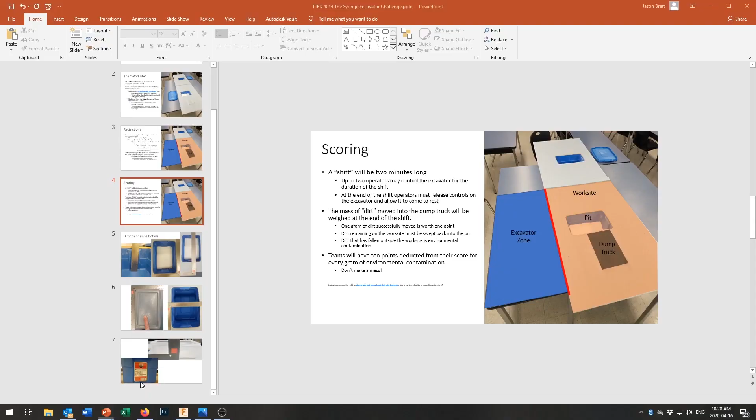To do that, we're going to have to add in some dimensions for the pit. Now, like everything else, I like to start off any of my new drawings or designs with a little bit of a sketch. So in order to get this sketch, I went back to a PowerPoint presentation a little bit earlier in this channel, where we went through what the challenge is actually going to be about and how it's all going to come together. Your excavator is going to be here in the excavator zone reaching into the pit.

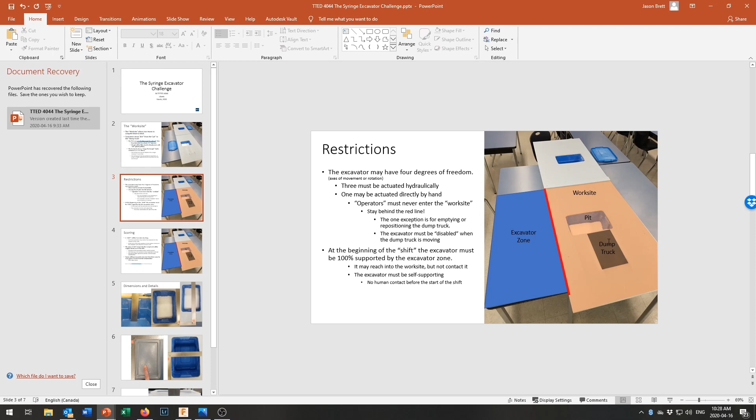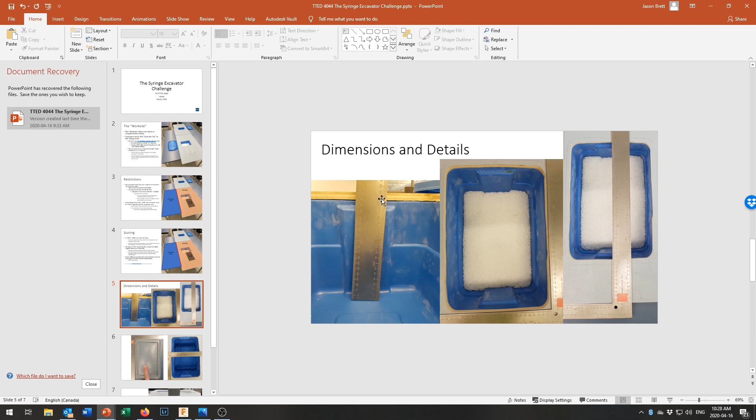The pit's going to be filled up a little bit higher, and you're going to be depositing the dirt, those plastic pellets, into the dump truck. And you're going to try to move as much as possible. Towards the end of that presentation, you've got some photographs with the measurements of the pit and some basically sizes and scales so that you know how big to make things.

So I was able to take some of that information right here, and I printed out a quarter scale drawing of the arm that I've got together right now. And then I was able to take the dimensions from the drawing and come in here and sketch in how this is going to go. And right now, this is actually looking kind of okay to me.

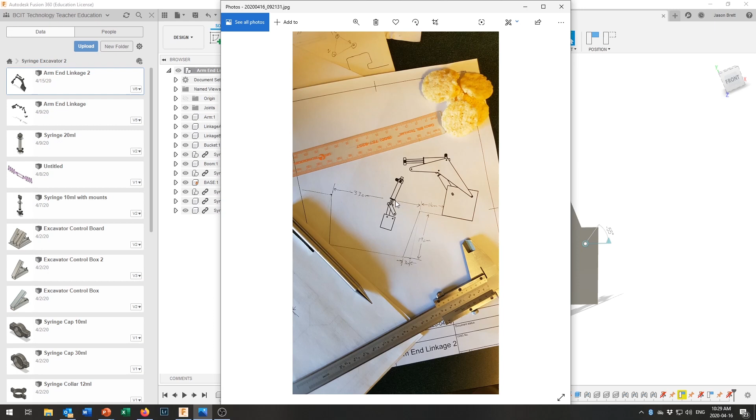Looks like we might want to get this down a bit deeper, so we might have to play around with some of those parameters in there. And we also need to be able to get it up 9 centimeters. Again, this is at a scale of 4:1, or 1:4, I should say. We need to get it up 9 centimeters on this side, or over on this side it doesn't matter because you can put the dump truck on the sides of the pit. We just want to make sure that when we do a scoop that we can lift things up and out of the way. And so, like I say, always start off with a drawing of what you're going to create.

So that you have an idea of what it's going to be when it comes time to go ahead and make that part. And then we're also going to take a look at ways where you can actuate some of these syringes individually rather than doing this whole inverse kinematics thing where I have to just keep pulling on it and hoping that it bends the way I want it to go. So hopefully you've got this kind of movement right now and things are limiting themselves and staying within their range.

And now we'll take a look at saying, do we have enough range? Now, keep in mind, our analysis is also going to be subject to our last discussion on the impacts of what happens when you lower that boom. And you can see right out here that we've got a nice big lever arm right up here. So we should be able to get lots of torque to twist that up and down.

But you have to watch out as that boom comes down lower and lower in here. Sometimes your lever arm gets shorter. And if you come too far and your boom's down on this side, then you've gone over center and locked it in place. So we are going to have to play around with some of our parameters to make sure that we don't end up locking our boom in the down position, because yes, we could drag it back up in Fusion 360, but that's not going to happen in the real world.

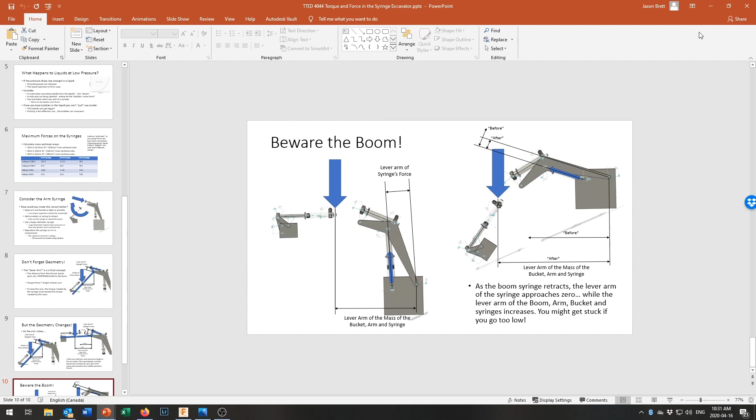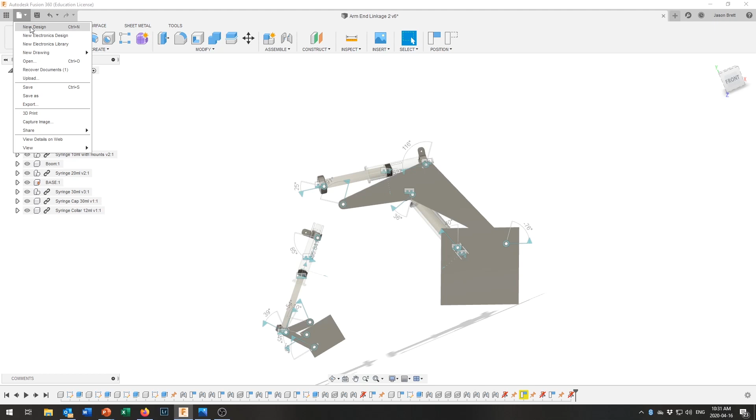Okay, so I think the simplest way for us to go about doing this is going to be to create a new design. So just come up here to new design, make sure that you've got your syringe excavator folder opened up right here. If that's taking up too much space on your screen, you can click on the little data panel right there and poof, you've got the whole thing. If you need that back again to see that, just click on show data panel, and we're just going to come in here and tell it we want a new design. There we go.

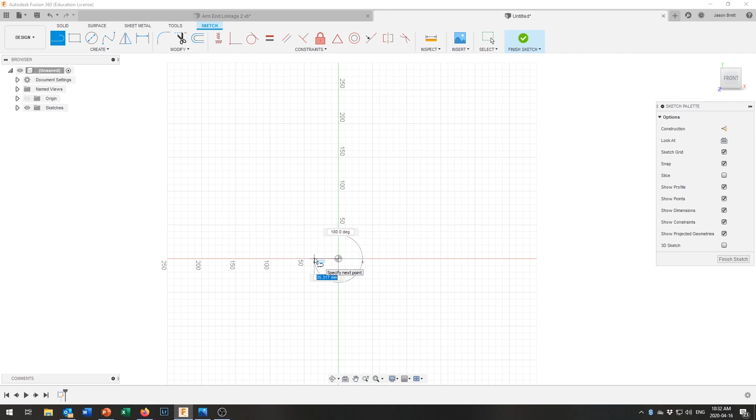And on our new design, we're just going to create a sketch right here, and we're going to pick any old plane. That one should do. And now we're just going to sketch the profile of the pit that we're coming into. Okay, and so let's come along right here, and we may as well just start at the origin right here. And according to my measurements, we'll be 11 centimeters along here, so that'll be 110 millimeters.

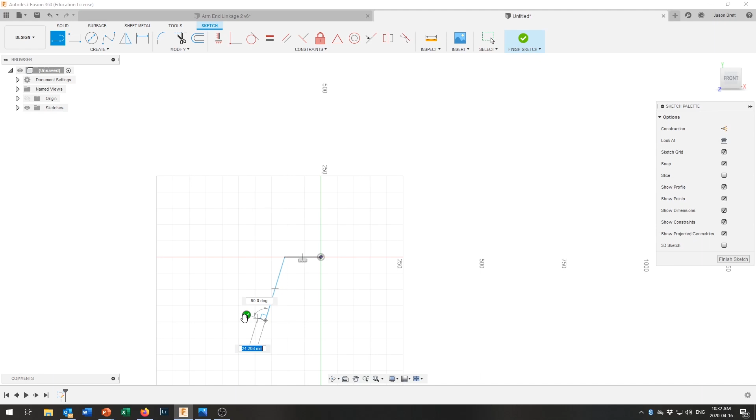So I'm zooming out a bit, and we'll dimension it later. Okay, then it's going to come down at an angle in here, and it's going to come down about 19 centimeters deep. We'll dimension that later. Then we'll come over this way horizontally. We'll come back up to this level, and then we'll come some distance out this way. And then we'll just say that's all good for right now.

Okay, let's come in here and add some dimensions to this. And from the dimensions shown in that PowerPoint with all the pictures of our setup, you'll notice that from the edge of the plywood to the beginning of the pit, it is about 110 millimeters, okay, 11 centimeters. Then from the bottom right here, right up to there, is 190 millimeters or 19 centimeters.

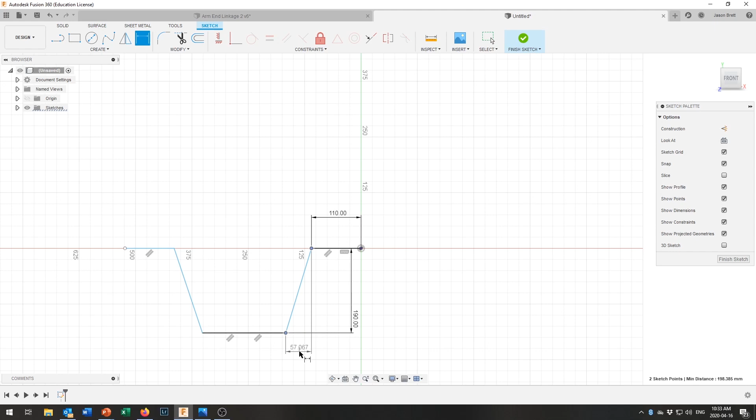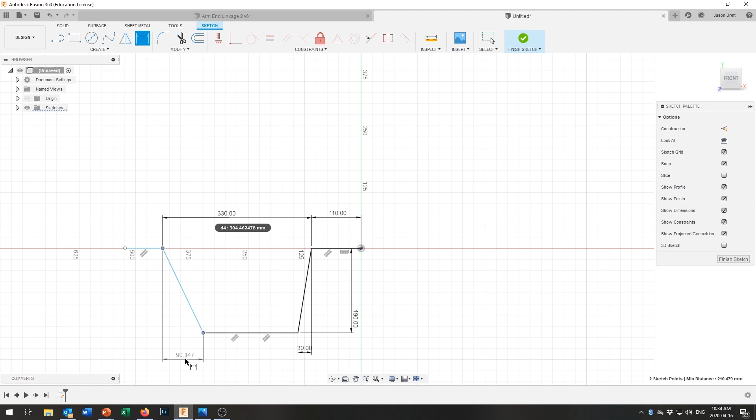And from this point right here to this point right here, you can see how we can get an aligned dimension. I want the horizontal dimension, so I have to bring it down here to get that. That is going to be about 30 millimeters because it's 3 centimeters. Dimension across the top from right here to right here is going to be 33 centimeters or 330 millimeters. And the dimension from right here down to right here, again, I have to pull it downwards, is also going to be 30 millimeters. That brings that in right there.

And over on this side, it's going to be a little bit longer, but I'll tell you what, if I make it 11 centimeters on that side as well, then everything's fairly much symmetrical. It doesn't matter which way it comes out when I put it in. Now, this is just going to be a profile. We could create a 3D model of the entire thing, and we will do that later on when we've got our structure all put together.

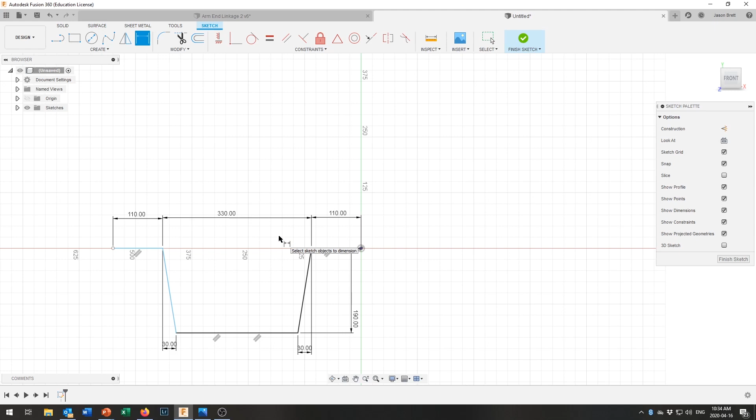But for right now, I'm just going to keep it as a two-dimensional model so we can see that excavator bucket reaching right down into here and seeing if our bucket is going to have the range and the stroke that we need to be able to get in there without jamming up any of the syringes by going over center or anything like that up over here.

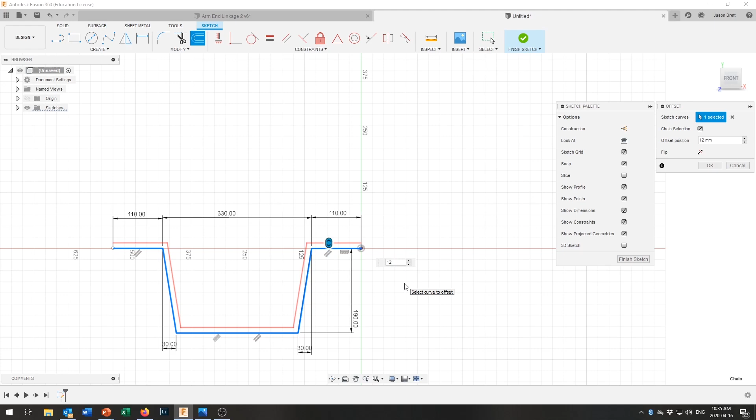All right, now the quick way to turn this into a little bit of a wall is that we can come to create, and there is modify, where our offset is. Offset, exactly. There we go. And let's take that curve and we want to offset it to this side. And let's offset it by, I believe that is 1/2 inch plywood at the top. Let's offset it by 12 millimeters to get our 1/2 inch plywood. Okay, and now you can see that we've got a profile on here.

Now, obviously, this is not the true profile. There's some little perturbations in here. This is close enough that we're going to be able to approve our design and get the optimal dimensions for it. How it comes in the final drawing is going to be up to you. Now, to make this a profile that we can extrude, we need to add a line at the end right there. And we need to add a line at the end right there. And you can see that shifts into blue right there so that we've got a profile that we can work with.

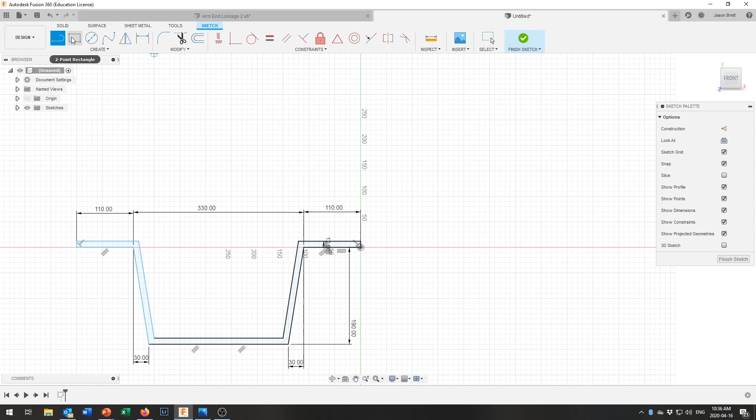Okay, the next thing that I'm going to add right in here, coming off from this side, is a little bit of a base. This will be the table, the excavator zone that our excavator is going to rest on, and the excavator is going to come in here and its base is going to butt right up against here. This is the wall of the construction zone according to that PowerPoint that we were looking at. So we can come in here and we can just take a rectangle right here and draw it out like that. This comes some dimension back this way.

Put that in right there, and it goes blue because it is a rectangle. And we probably don't need to do much else. That's going to give us a surface right there. But what we can do is we can take a collinear constraint and say that this line right here should be collinear with that line right there.

Over constrained, it already figured that out. So when I say over constrained, that was the error that flashed up right there. And it's saying you don't have to tell me that's collinear with that one because that point is coincident to that point, and we've got horizontal constraints on both of them, so therefore it has to be collinear. Perfect. We now have a profile that we can extrude.

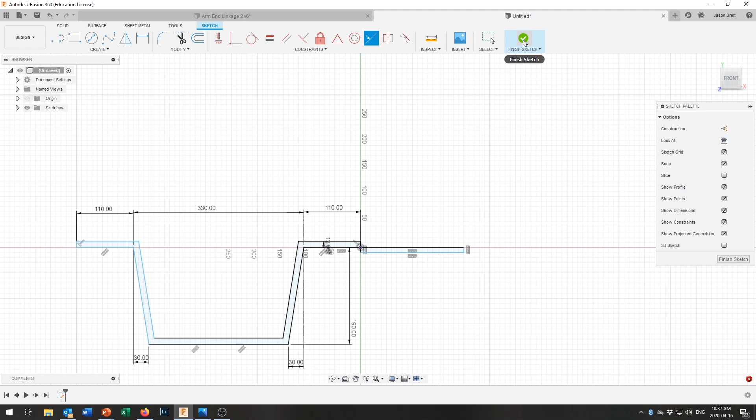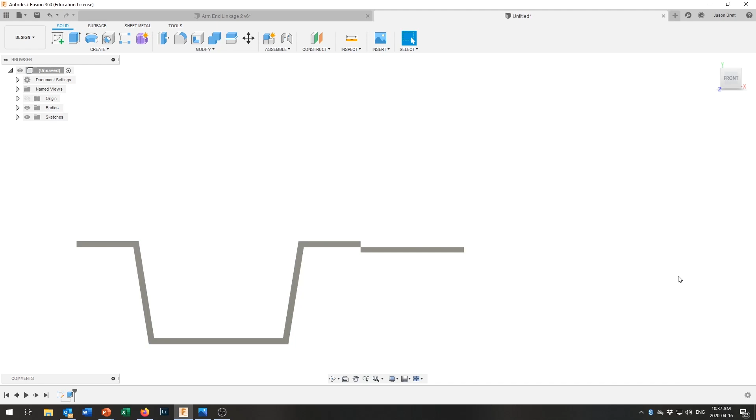Let's finish that sketch and let's do an extrude. Let's take that surface and let's just extrude that by, let's come out 10 centimeters, 100 millimeters. It really doesn't matter because we're just using this as a profile right now so that we can see when we put our excavator right here, how deep it's going to be able to reach down into the pit, and we're going to be able to test its range of movements.

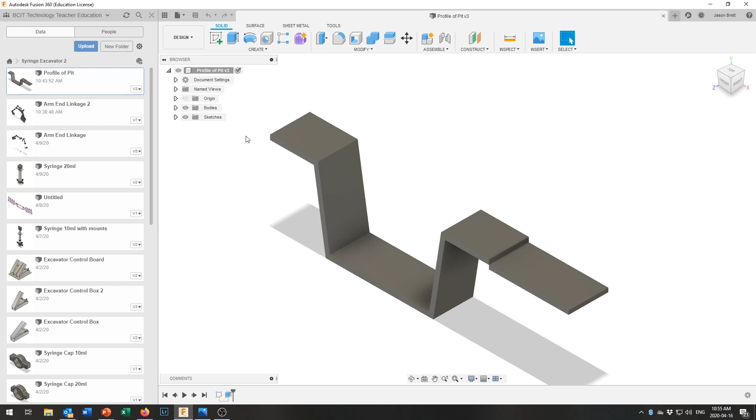So now that we've got the general profile set up, let's just put one additional reference into here. We do need to lift our bucket 9 centimeters above the platform right here in order to get it into the dump truck. That shouldn't be a problem, but we want to make sure that we've got all of our critical dimensions in here. So let's just add a quick little sketch right onto this surface right here.

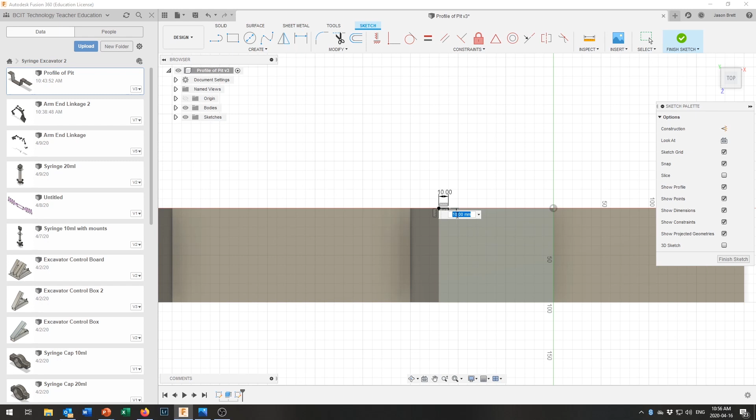And I'll just take a little rectangle, doesn't have to be very much, and just tuck it in this corner right here. And let's just make it, actually it doesn't matter how big it is really. Let's dimension that in there. And let's just make it a little pole, 1 centimeter by 1 centimeter. And we'll finish that. And then what we'll do is we'll just extrude this 90 millimeters.

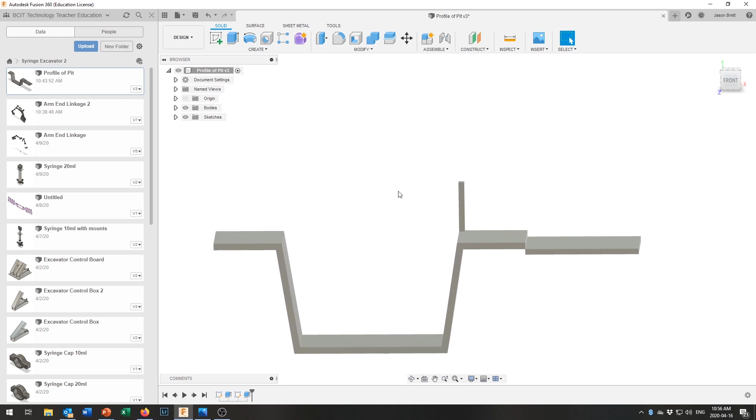Now, like I say, this is just a little bit of a mock-up so that we have a measuring stick right in here. So when we go to test our arm, we can just sort of eyeball that and make sure that we're getting higher across there. If we wanted to, we could actually build a little bar in here. Heck, we could build the dump truck right in here. It doesn't really matter. This is right now just being used as a visual reference for us to make sure that our range of motion is going to be able to come down in here and scrape everything up.

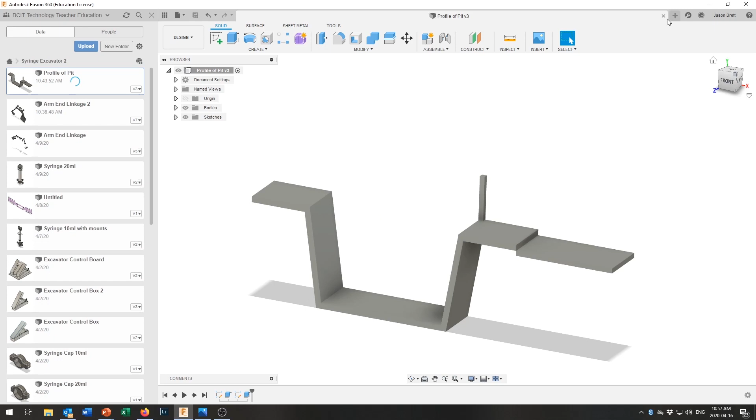And let's go ahead and close this design, the profile of pit, and let's save that. And we can actually close this design because now we're going to come back to our arm end linkage and open that up. And you'll notice different numbers down here. So this is one of the nice things about Fusion.

If you ever screw up on your design, you can just click on here and say, well, yesterday I was doing pretty good. So you can go back multiple versions into your design and it saves it for you at every step so that in the event that you mess up, it's there for you and you can go back and fix things up. Okay, so that was our arm end linkage that we were playing around with at the beginning of this video and how it all comes together.

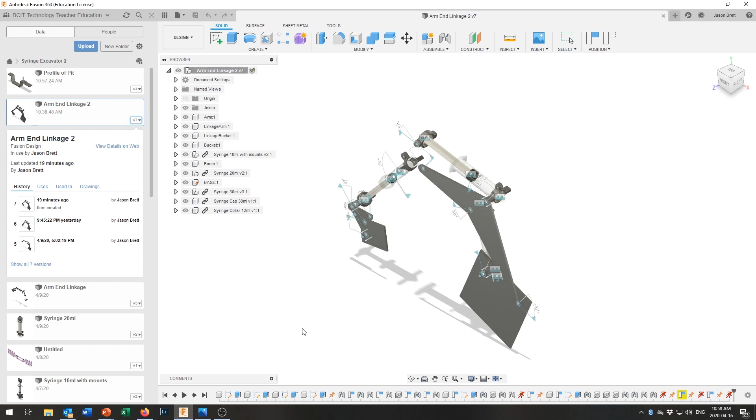And what we're going to do now is we're going to drag profile of pit into here. Okay, and it just becomes another component in our diagram. We can move it down a little bit so that we can see things more easily. Doesn't really matter where we put it because we're going to now use that as our reference and we're going to ground our arm to it. So let's just say, okay, we've got it in there somewhere. I'm not too worried about where it is.

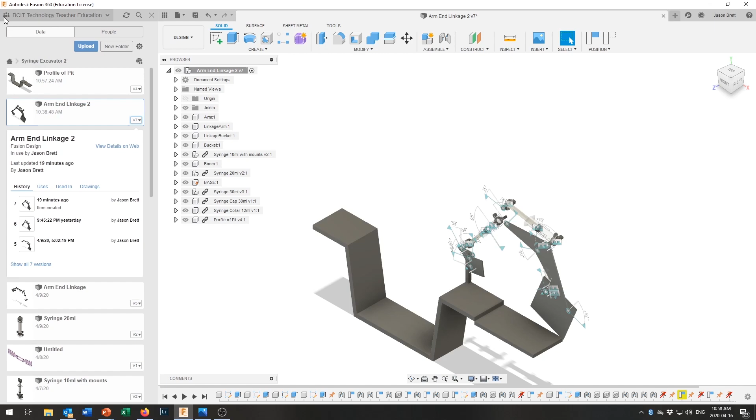I'm going to click on this little button right here, hide the data panel, so I've got the full screen to work on. And now before we join anything in here, we have to think about the fact that for all of our testing so far, this base has been grounded. And you can tell it's grounded because when you come and look at your design, you can see that the base has that little pin next to it. Okay, that means it's grounded.

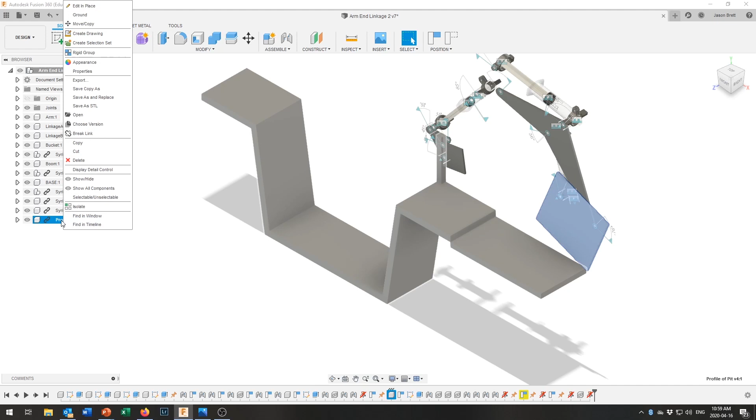We want to move the base to match up with this design right here. So in order to do that, our profile of pit is going to become the new grounded thing. We are going to unground the base. And now there's no longer a little pin right next to base. We're going to come down to profile of pit, right click on that and ground that so that you get the little pin right in there. And now in our overall context, this base can't move around at all.

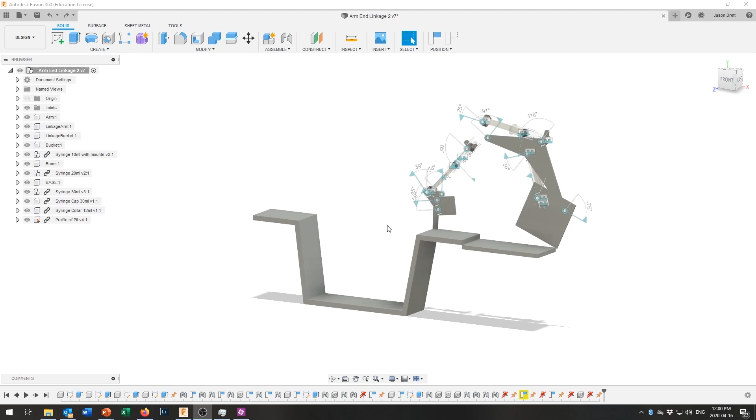Well, anytime you see the screen blip like that, that is a sign that there's been a disruption in the timeline and I've come back to fix a problem that I ran into. And in the past videos, some of those have been glossed over. And I just thought it was important to mention that I know as you're following along the videos, you'll sometimes miss a critical step and you'll have to go back in the video and you'll have to hit undo a bunch of times. And then it won't be immediately obvious why you had to go back and undo something.

And believe me, I know where the undo key is because I've had to come back. I was about half an hour down the road into this explaining how something was going to work. And although I could have fixed it at that point, it would have interrupted the time flow for you and it would have created more confusion than necessary. So I hit undo a whole bunch of times and I came back to here and I'll show you how to do it right the first time so that we don't run into the problems that I ran into a little bit later on. Okay, so now we've got this grounded.

Okay, so our profile of the pit is grounded, and we need to attach the arm to it. We're going to attach the base of the arm onto this platform right in here. And we need to attach that in such a way that this stays put and doesn't flip around when we go changing our parameters. And there's a number of different ways to join it. And we want to make sure that we get it in a way that's going to work while still allowing the arm to be nice and flexible.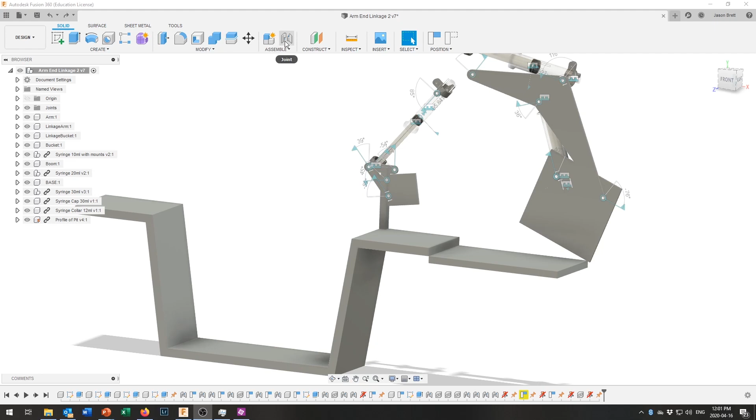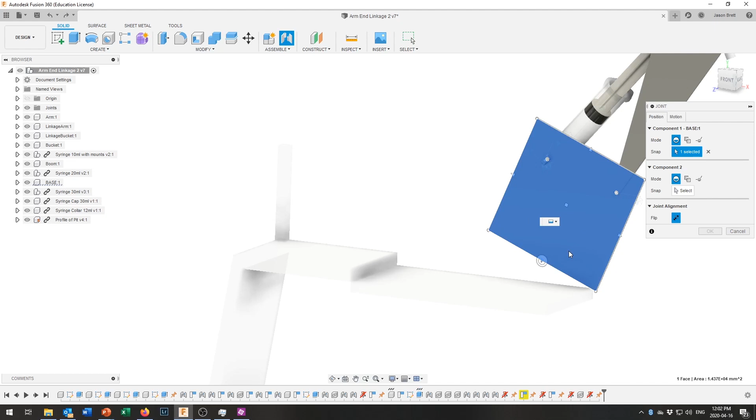So what we're going to do is we're going to create a joint and we can just click continue. I'm not too worried about the fact that the components have been moved in there. This puts it back to the way it was last time we made a joint. And I'm going to select this face right in here. And I'm not clicking right on that center node, just the entire face right there can be selected. Okay, and you can pick a corner. I'm going to pick that corner of that face right there.

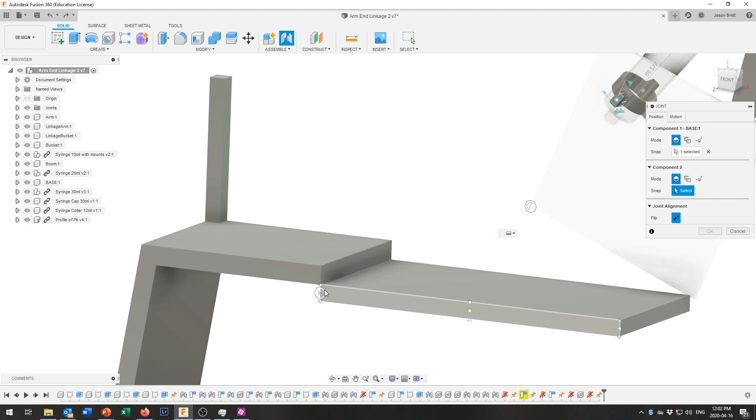And so that is our joint right there. And we've got the face selected right here. And what we want to do is we want to join that together to this face right here. So pick that face and it says where on that face do you want it to join together. We're going to click right there. Now you'll notice that spun everything around. You may have to hit the flip button.

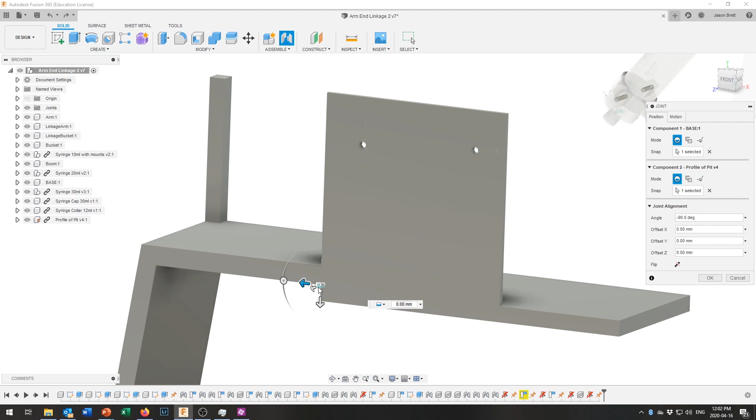And if you've got it right, the lower of the two holes right here is going to be in the front, about like so. Okay, and we have all sorts of abilities to tweak and adjust this. If we want, we can move it in from the edge a centimeter so that we can see our profile really clearly right there. And so there we go. Click OK right on there, and then the rest of our syringe comes in to match.

And now we should be able to take a look at it from an orthographic point of view and reach out and dig down. Oh, that's not going very deep. We'd really like that bucket to be able to reach all the way down or pretty close to all the way down to the bottom. So this is why we're still playing with the parameters and we haven't come through to build our final arm yet, is we're really at a prototyping stage and we're trying to figure out this range of movement using the syringes that we've got right in here.

And one way we can bring this down a little bit lower, you can see that this syringe is already retracted all the way. If we drop this measurement down a little bit right in here, in fact, we could drop this one down too, and we can bring them both down a little bit. But let's take a look at this one right in here. And to change that, we come into our parameters, and that parameter right there is in the base, and we know that that one is the second hole.

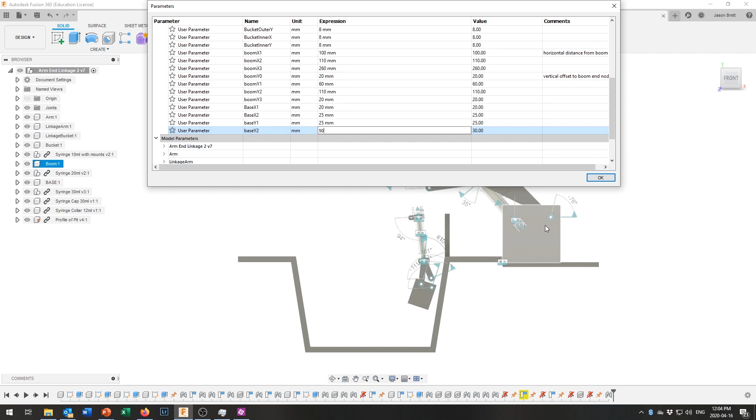Y is our vertical dimension. And let's drop that down to 50 millimeters down from the top. And you can see that dropped right down in there. And let's just say OK. And let's check our range of movements. And now that comes almost all the way down to the bottom. And yet it still comes up high enough. In fact, we've probably got enough distance in here that we could bring this down even a bit lower.

And as we bring that down, what's also nice is when we're in our lowest, most stretched out position over here, when our torque about this movement right in here is going to be at its highest, we're actually increasing the lever arm distance between that line and that line. We're increasing that perpendicular distance between the two of them so that we get more push to lift that back up, which is going to be important because there is going to be a lot of torque when this is a full bucket right in here and we go to try to lift that back up.

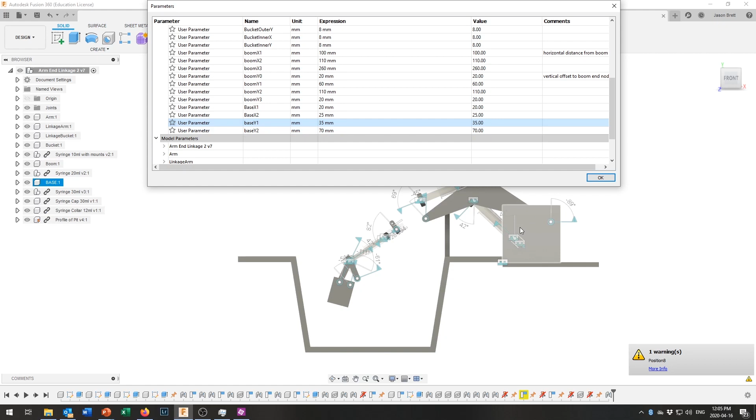So let's come in here and let's modify our parameters a little bit more. And I'm going to take that down to actually 70. I got to click on it right there. 70, and this one, I think I'm going to bring it down because we've got lots of additional height. Let's bring that down to 35 right there so that that's recessed down into our base here. We're basically just lowering the effective height of the base.

And now we can come down, and at this end, we're actually going all the way through the middle. We've still got plenty of up availability on there. And when we reach out this way, we'd like it to be a little bit longer. We'll take a look at that in just a moment. But that is coming down quite low. And what's nice is that we're not going over center with that syringe. That big 30 milliliter syringe has a lot of lifting to do. And I think this is a pretty good range of movement for our specific design parameters.

Okay, if we needed to reach up higher, obviously we'd redesign that arm a little bit. Other things you can play with in here, you can play with the location of our connection right up here. We might come along and play with that in a bit. You can play with the length of this right in here by making this go a little bit longer and have it come out here. You've got a whole series of parameters, and you can play around with them.

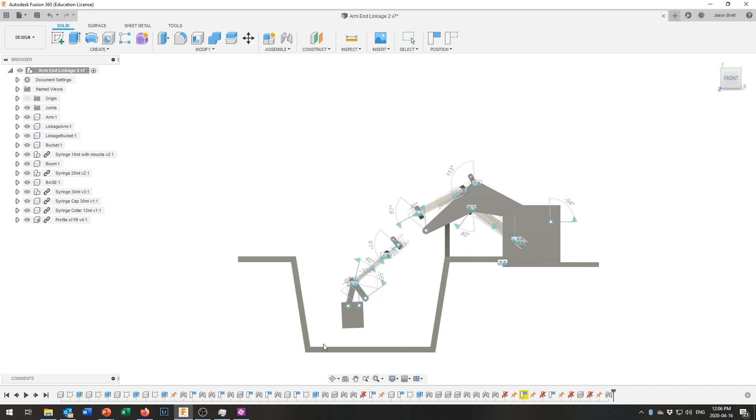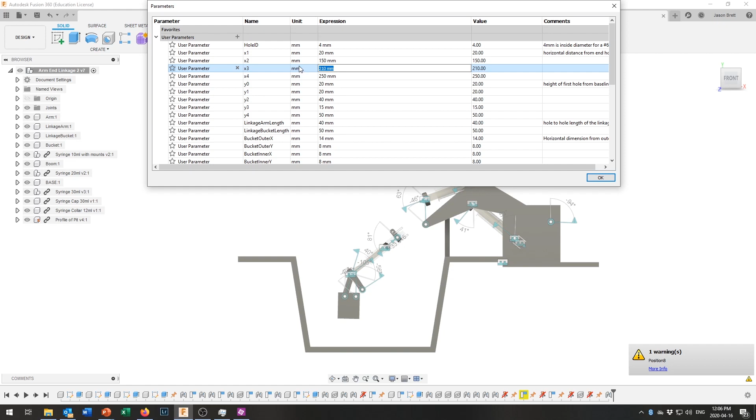Let's see if we can make this stretch out a little bit further right in here. So let's come in here and take a look at our parameters. Now that was in our arm right here, and those were the X dimensions along our arm, and X3 and X4 were the long ones that had to reach out a long distance. And let's set this up to 250, give ourselves a couple extra centimeters, and we can set this one up to 230, we'll match that. And now you can see that arm, let's just click OK, reaches out a little bit further, comes down lower than we need it to, in fact, lifts up really good, still stretches out right here.

Now the downside of doing too much of that is that as this distance in here gets longer, the torque required to lift this back up gets higher. Okay, we've still got a pretty good range of movement. In fact, we've got more range of movement possibly than we need right on there. And we might be able to adjust that in order to increase the torque of that arm. So if I take a look right here, this is how we set this part up. Maybe if we increase that height right there, that will increase the lever arm that's acting on this arm.

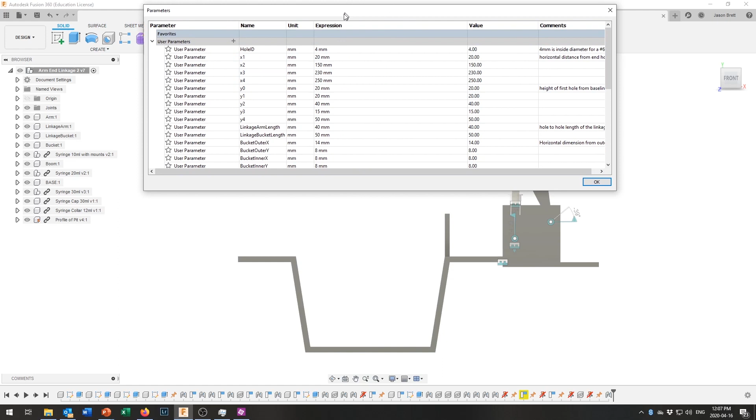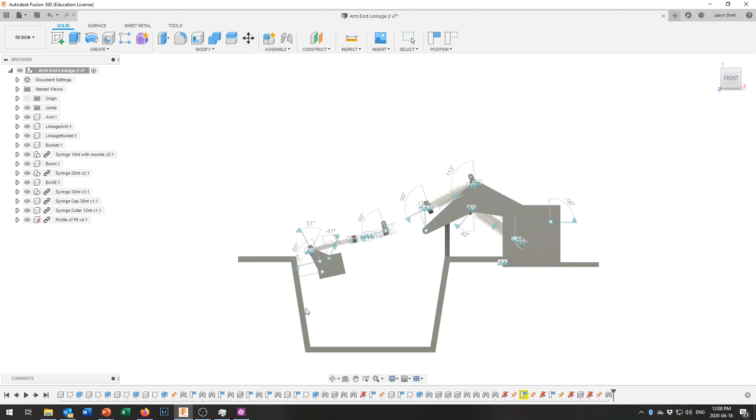So let's modify and change parameters, and let's change the height of this part right in here. That was Y4, the vertical height for hole number 4 coming off the bottom when we made that sketch. And let's give it an extra centimeter, make that a bit taller. And again, let's come down here and see how, now there, that tucks all the way back in. That lifts up really nicely, and you can see that we're getting a longer distance between here and here, meaning that this has a bigger lever arm to counteract the extended lever arm that we put out here. We'll still probably need some kind of elastic to help pull that back in.

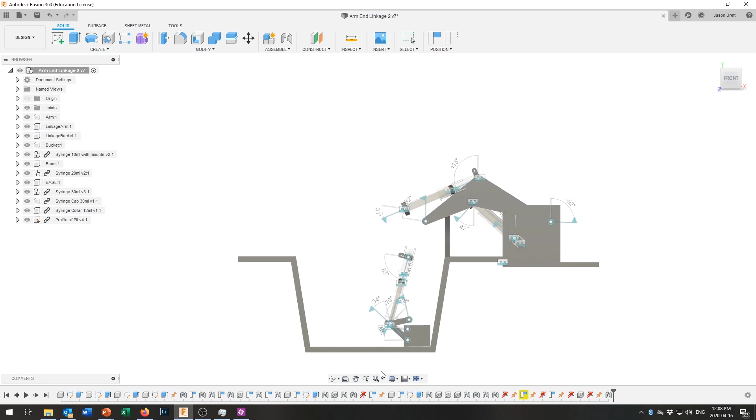And if our bucket was wide open right down here, the linkage is a little bit more complex to model, so I'm going to have to play around with that, and I'll show you some tools where we can play with them on a joint by joint basis in a bit. Right now you can get in here and you can drive certain joints around to see what that bucket looks like when it's open. But that's coming up here, and it looks like right out here we should be able to turn that and do a dump, come in, dig, come in, scrape up along that wall, and that seems to be working with a fairly nice range of motion in there.

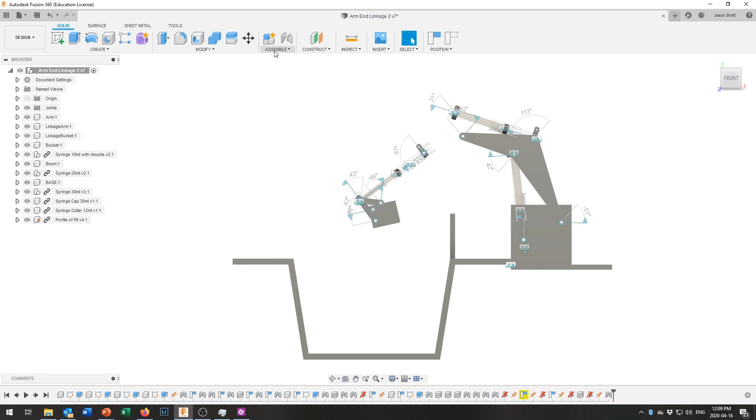I might even try increasing that height by just a little bit more and seeing what happens right there. So modify, change our parameters, and that was our Y4. Let's give it 1 more centimeter.

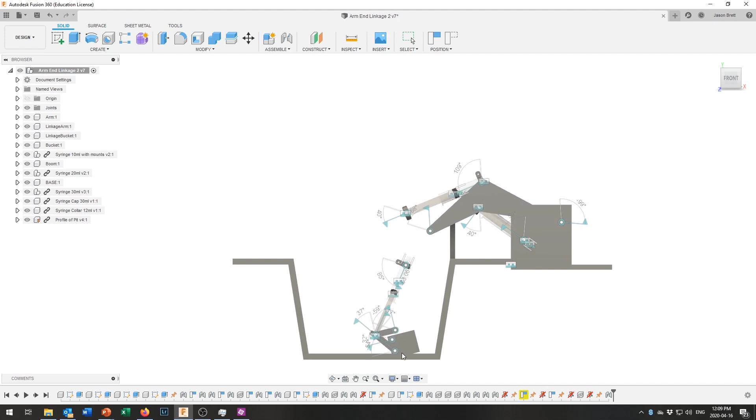Okay, longer lever arm right here. So that should result in a slightly reduced range of motion, but we've still got plenty of motion right in there to do what we need to do. It doesn't crank back quite as far anymore, and we've got more torque, so that arm is starting to look pretty good in there. And if we wanted to get right out over to here, we might, even if we increase that a little bit, be able to increase the length of that arm.

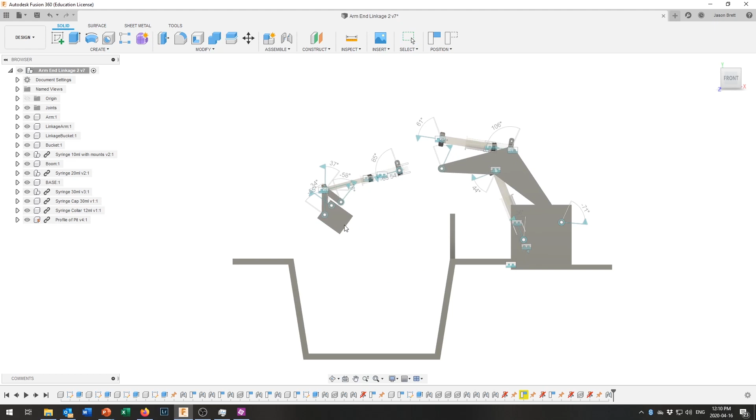Now I'm going to leave it to you to play with your parameters and come up with the optimal design for your arm. Okay, so go ahead, play with those parameters and get everything hooked up. And then as you're doing that, we can now start going back and saying, okay, well, here we were just focused on those dots. I didn't want to start drawing the whole diagram in because sometimes you end up with some weird looking things like that.

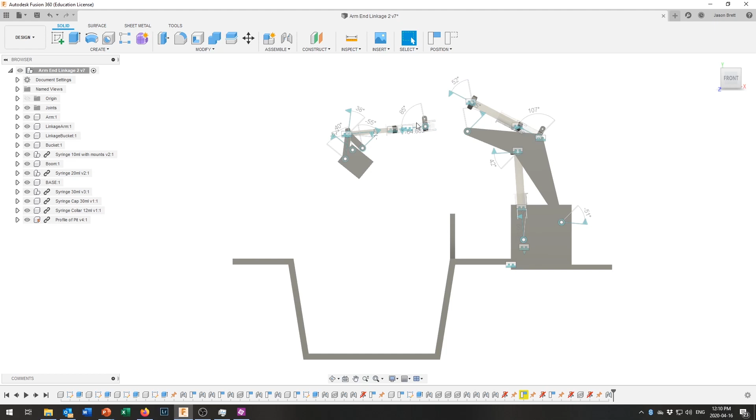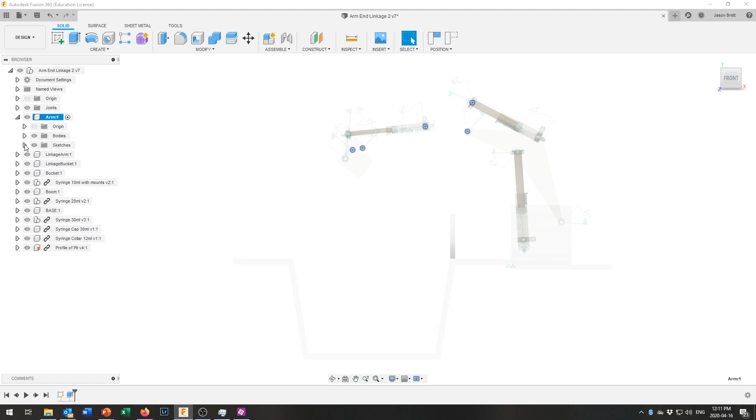Now what you can actually do is you can come in here and we can try editing some of these up. And so for instance, if you wanted to have a more solid profile on here to show you what this was actually going to look like, we can come in here and that was our arm. So linkage arm right here. You can activate, oh, not the linkage. We just want arm to be activated. And you can come into your arm and you can come in to your sketches right here. And you can take a look at sketch one.

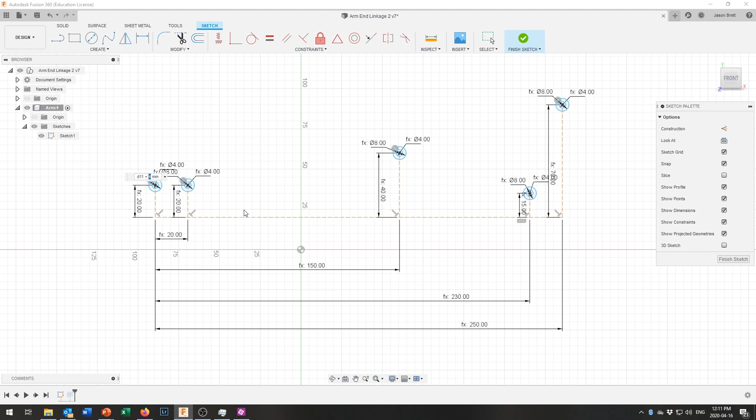And now you can say, oh, okay, we've got this all sketched out right in here, and we were just using these circle profiles right here. We could come in here and we can increase those circle profiles a little bit. And so if I change this dimension right here, that was D11 plus 4. Let's change that to D11... Let's make it a little bit of a bigger circle here. Instead of having 4 millimeters all the way around, let's make it have a centimeter all the way around. Okay, and the way we set that up, those all expanded quite a bit.

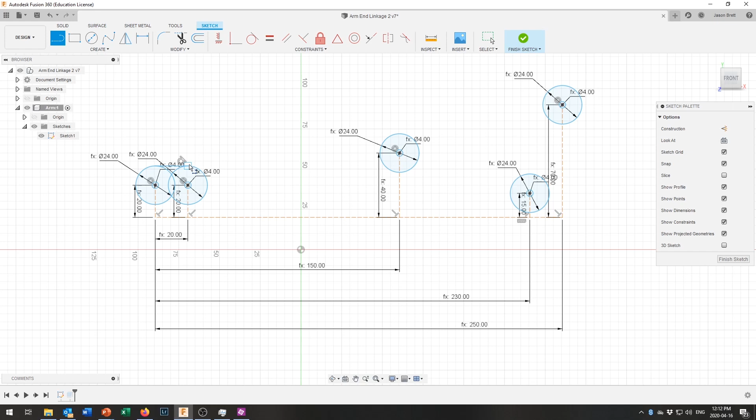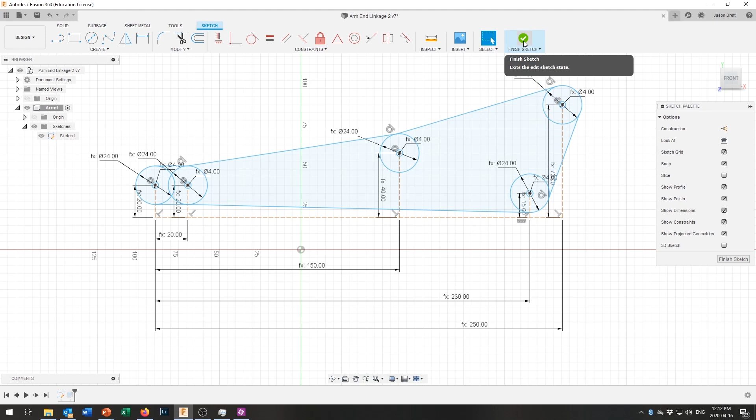And now you can come in here and you can add a few lines and you can join these together. And so you can pick a spot on here, pick a spot on there. And you can fill that profile in and we can say escape, we're all good right there. And we can finish that sketch right there.

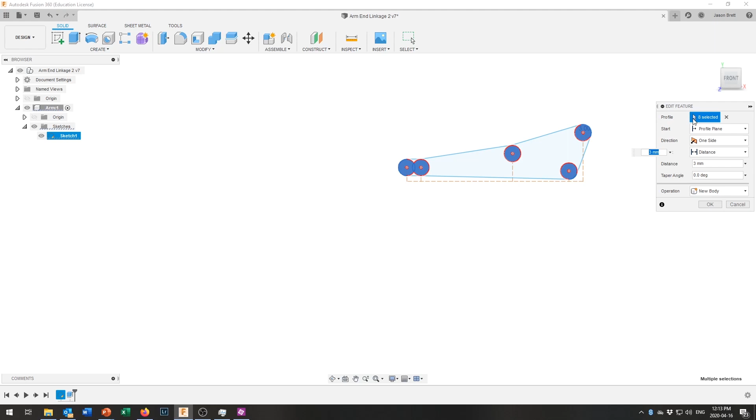And because we're still in this arm and we're looking at that arm, our timeline for that arm, you can see that we used to have this big long timeline of everything's been done. Now we're just looking at the arm right here. We can double click on the extrude for that arm, and on our profile it says there's 8 selected. Let's just add that profile in there and that and say okay. And now we've got that arm all put together as a solid piece, and that looks really great.

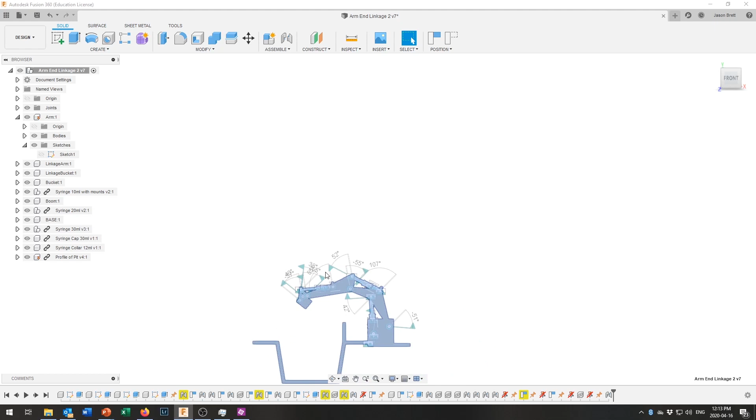Let's come up here and activate our entire structure. Okay, and now that's starting to look a bit more like a robot arm. There's our bucket right in there. That's working really nicely. Okay, we might want to come back in and edit that bucket to make it a little bit bigger now that we've played around with some of this. And here we go. It is starting to work pretty good.

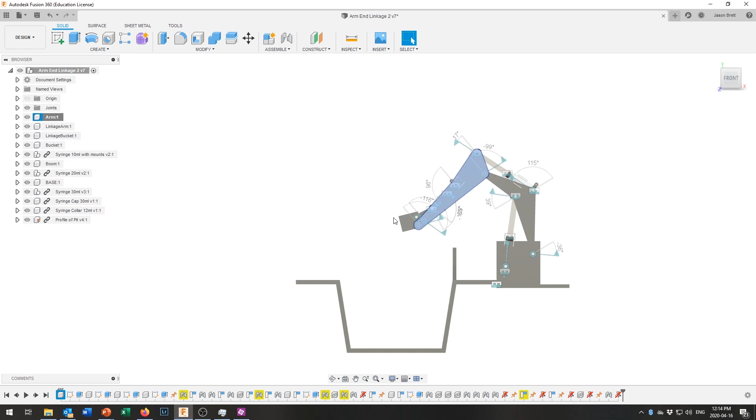Okay, now we want to come in here and it's ceased some of our movement a little bit right here. It's made the arm grounded again. Unground that. We'll just continue. There we go. And now that's reaching out down in there. And although it shows us that that's not, there we go. We're just holding the wrong part. That can reach out, that can come down in there, that can scoop up.

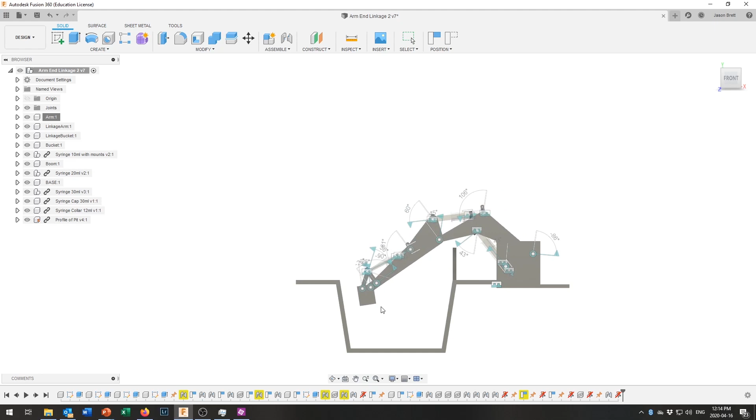And when this linkage is retracted, when the syringe is all the way out, comes in right there. Well, maybe we do want a bigger bucket to move more dirt in one scoop. I'll leave that to you to play around with. You might also want to come around in here and say, well, now that we've increased the radius around those holes to 1 centimeter on each side, we want to play with the radius on these holes. We can bring them up a little bit and make them a bit bigger. And so we can do the same sort of thing.

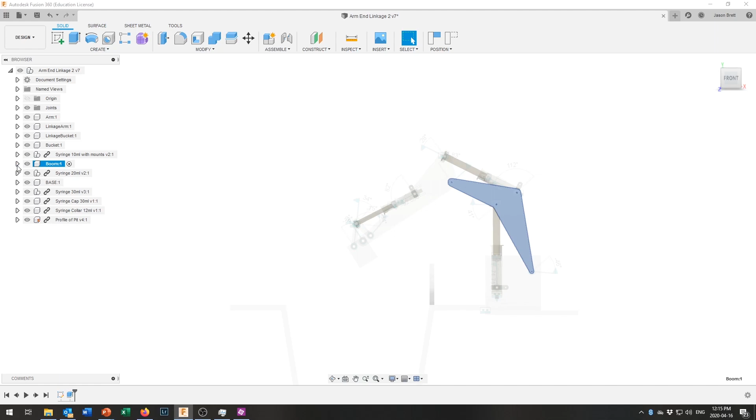So this right here is our boom. So we can make the boom active. Click on the little button there, the boom becomes active. We can come into our sketches right here and we can edit sketch 1. And what's really nice is, again, it's simplified it down because this is the only active part. We're just looking at that right in there. And there is sketch 1.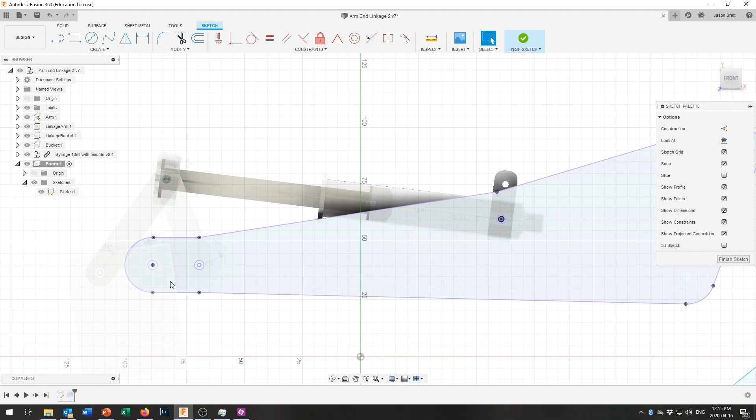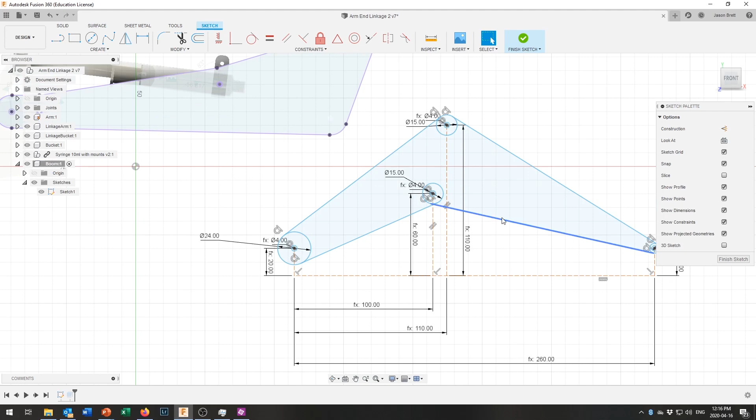And let's come in right here, in sketch 1. There we go, there's sketch 1. We want to change the diameter of our outside circle. We were at 15, I think they look better when we're up at 24. That comes up a little bit bigger. And let's set this outside diameter—it's at 15 right now, let's bring that up to 24. That expands up right in there, and that's probably enough to finish that sketch.

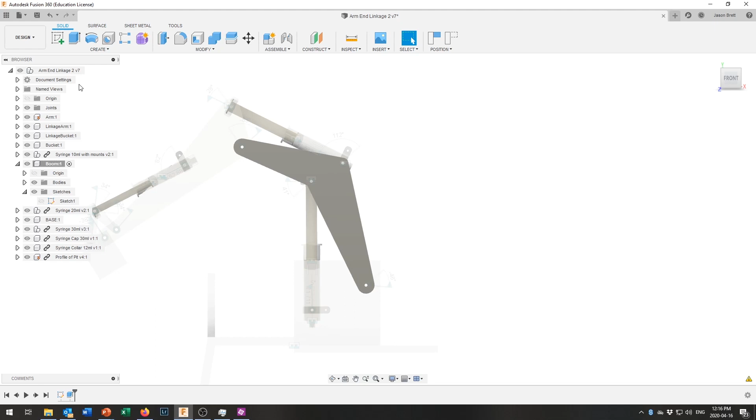And now that looks a little bit meatier at those two ends, looking a lot nicer, less likely to break. We've got more material in there, and we can come back in here and activate our entire component. And now this is really starting to look like a nice working syringe arm. Somehow it grounded this again for me.

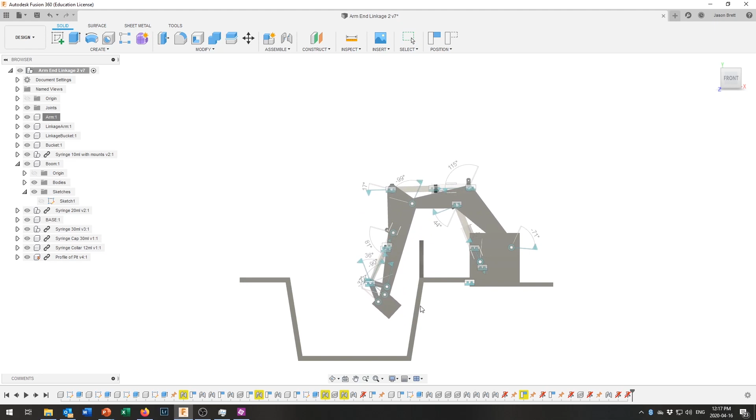Just unground that, and then you can get in here. You only need to have one component grounded at any one time. It's giving us a little bit of warning on some of our connections right in here, but they still seem to be rendering just fine. And we have a two-dimensional profile of a working arm that manages to meet our requirements and is able to dump things out. And that's looking pretty good.

Okay, so in the future I'm going to take a look at how we can start to bring some of your control boards in here, and we can actually set it up so that—remember we made a control board a little while back—we can create a linkage between the control board and each of our syringes so that we can move the levers back over here just like you would when you're driving this for real, and you can examine the entire range of motion, and then we can render it out and take a look at it.

But what we're going to do in our next couple of steps is actually take these profiles and use them to create real three-dimensional pieces that we can cut out on the laser cutter so that we can assemble things. What we've been doing for right now is determining what sizes and lengths are going to be optimal for our design. Because everything's parametric, you can go in there and tweak these.

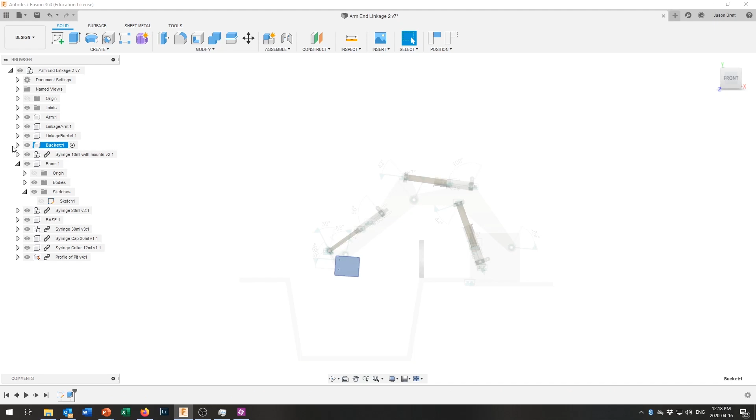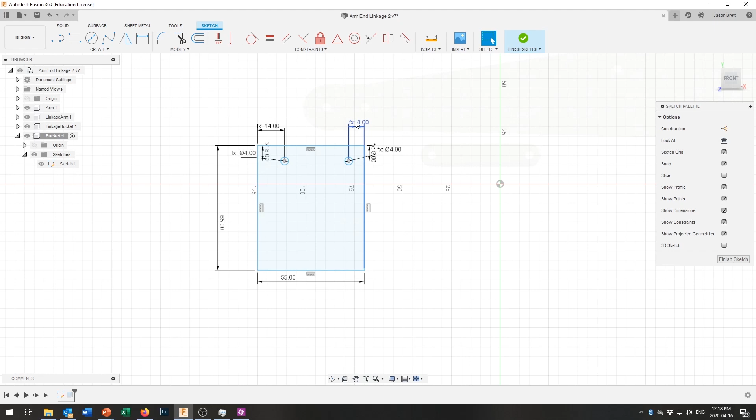You can also play with the location of these connections right here in your parameters, because those were parameterized. Just remember when you're all done to come back and activate the entire component, and watch out for the fact that it keeps making that arm grounded.

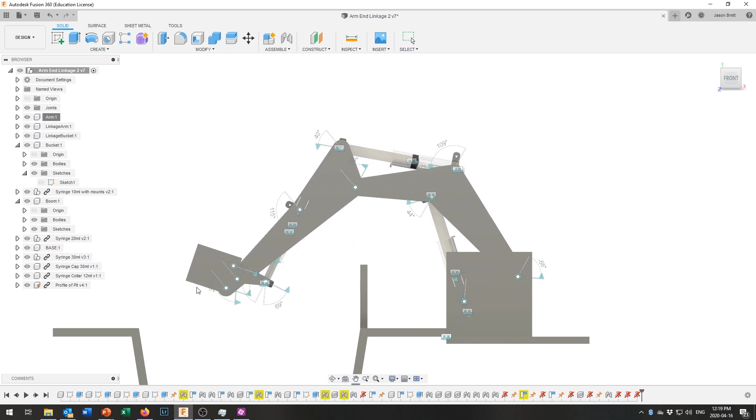It really, really, really wants to ground that arm. Okay, and oops, there we go. Get that bucket coming around the right way, and you may have to play with those connections right in there in order to get your bucket control working again, because that dimension between there and there does affect the ability of that linkage to move things.

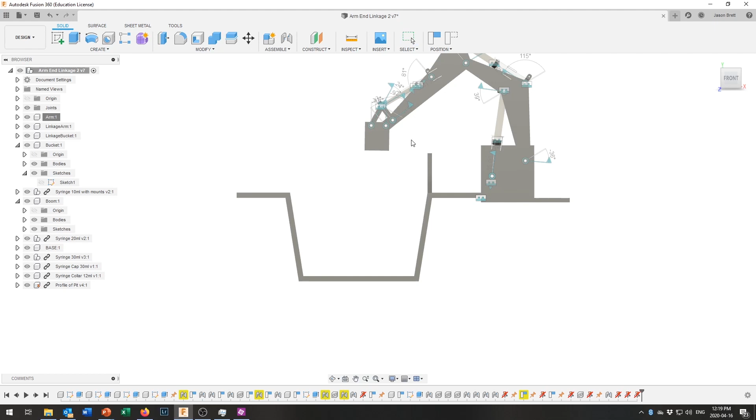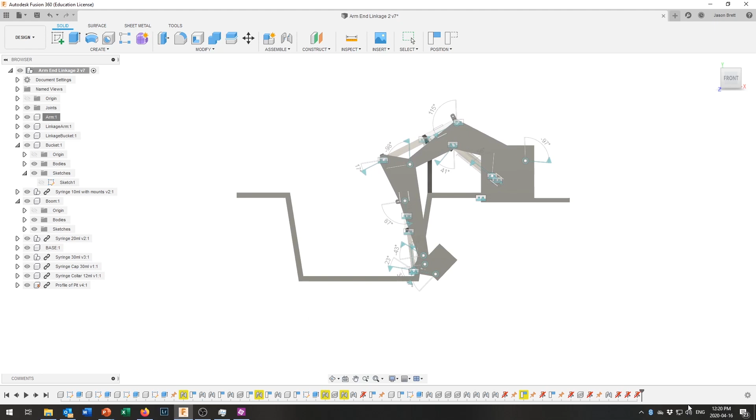And you can see right now with that change that we made in the dimension, it's a little more difficult to scoop that all the way around. Oh, looks like it does come out pretty good. So that can come in and that can scoop down right into the bottom, scoop everything up. Then you'd be able to curl that in. In order to lift it up, reverse kinematics requires me to push it back in the wrong direction. But there we go—that goes in, picks up, scoops out, and you can reach out and dump that into your dump truck.

Hope you get some great dimensions. Have some fun with that. And remember, if you have to go back and try something a couple of times, we've got the undo key. Every time you save it, you get a new version of it, so save frequently, and you can always go back to a previous version and say, okay, I'm going to start over from there again.